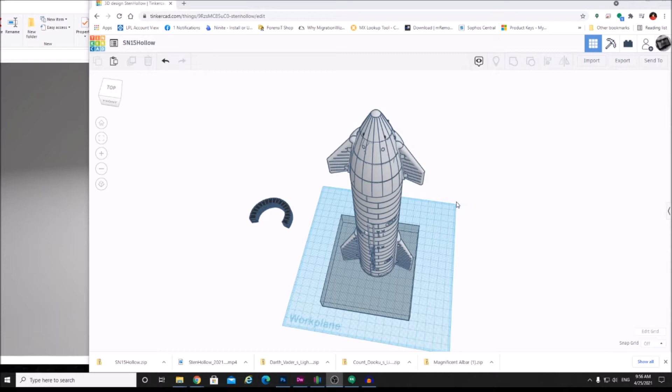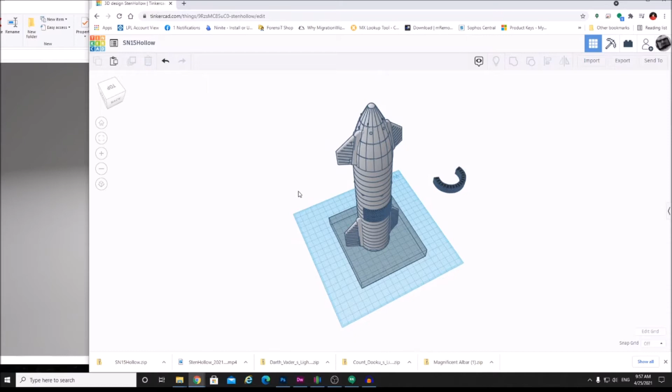You guessed it, it's a nerdy thing I'm doing right now. I'm working on a 3D model of a starship, which is nothing new, but usually that means a fictional starship. Well, times are changing, and this time I'm working on an actual starship, one called Starship by our very own SpaceX, which is making a completely reusable vehicle that will allow us to return to the moon in style, and Mars and beyond, thanks to in-orbit refueling and other nerd technobabble.

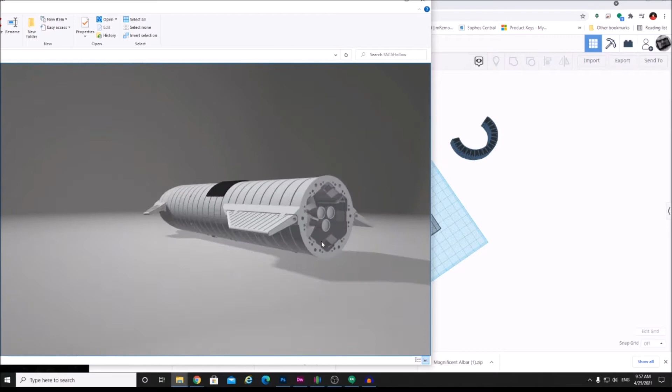So let me show you what I've been doing. First off, let me say I've been working on the shoulders of other giants who've been designing these 3D models. I'm taking mine a bit of a different way.

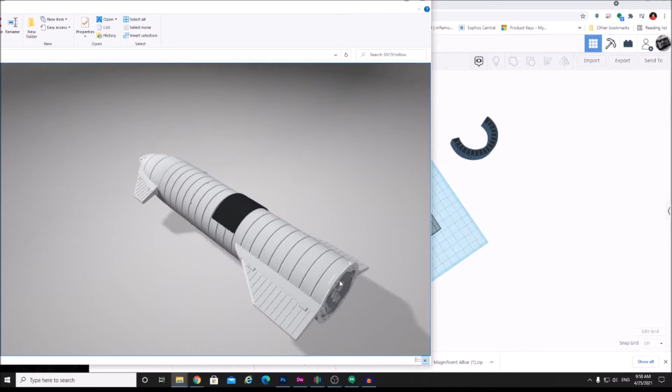I'm making SN15, which some of you may know is currently on the suborbital launch pad, getting ready to do its static fire tests and then eventually its launch. So I'm working on a prototype. This isn't the one that's actually going to go to space, but this is where we're at right now.

One thing I'm doing that might be different from some other people is designing one that can all be printed as one piece, at least the fuselage and the fins. I want the fins to be posable, like in the actual Starship, but I don't want them to have to be glued on. I'm just going to design it so I can print it all as one piece and the fins will be able to work.

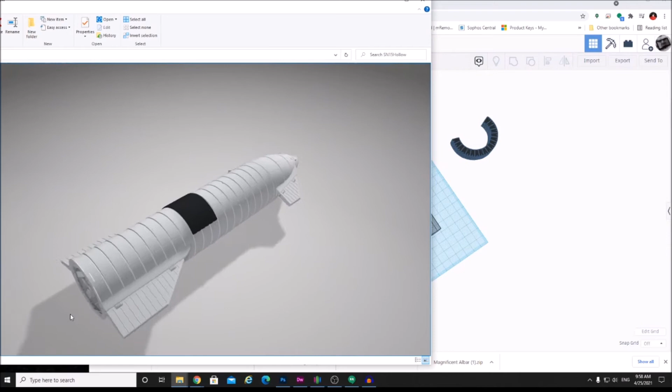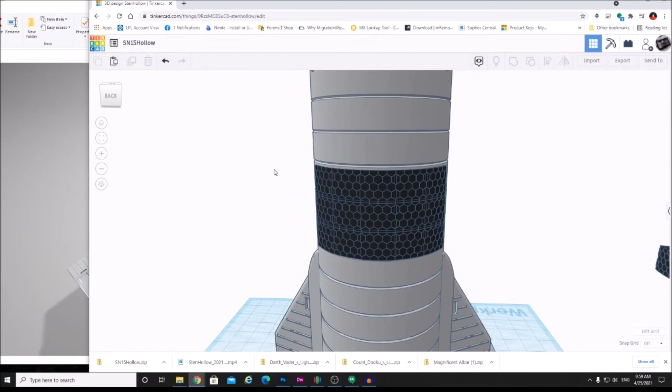Also, you may have noticed the hexagonal heat shield tiles arrayed here in their splendor. These are not, some of you might notice, completely accurate. Maybe they're slightly the wrong size, maybe you're counting the number of 304 stainless steel rings in the hull and saying that's not the right amount, or the grooves are too deep. In all of those instances, you'd be correct. This is not a hyper-accurate model by any stretch of the imagination.

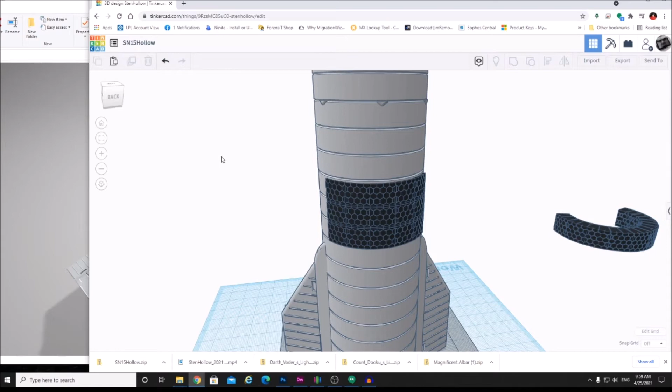What I want to do is make sure my details are a bit amplified so they'll show up after the model is 3D printed. If the details are too fine, you won't even see them because of the limitations of 3D printing. So what I'm showing you right now—oh, and I'm not resin printing, by the way, if you're wondering.

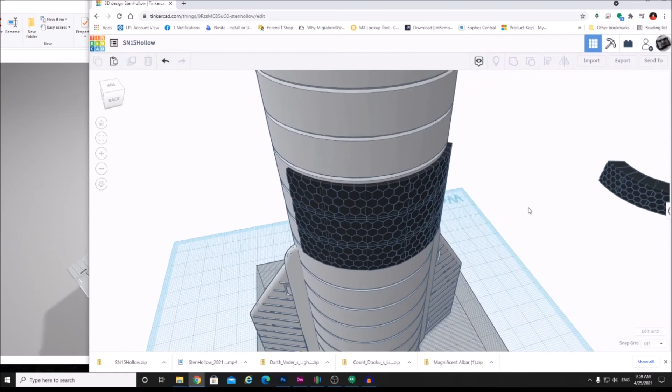So my master plan is to have these heat shield tiles, this sheet of heat shield tiles, be removable, so you could have them on or off, or get more of them and stick more on to cover the entire windward side or belly of Starship, so your model won't burn up on re-entry, because nobody wants that.

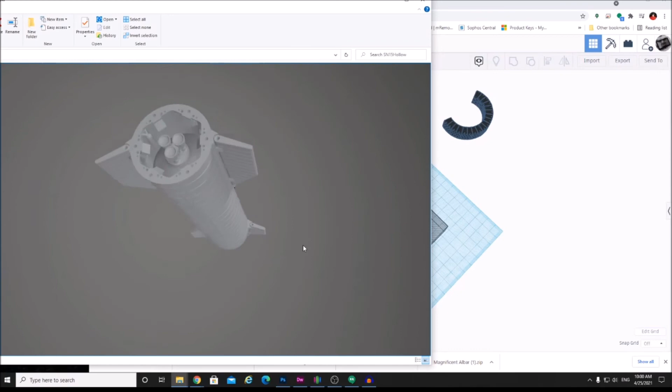The reason I'm planning to do it that way is, one, because I think it's kind of cool, and two, because later prototypes will have the entire windward side of Starship covered with these heat shield tiles, so you'll be able to take my SN15 and add more tiles to make it more like the 16 or 20, or whatever the plan is that they've got.

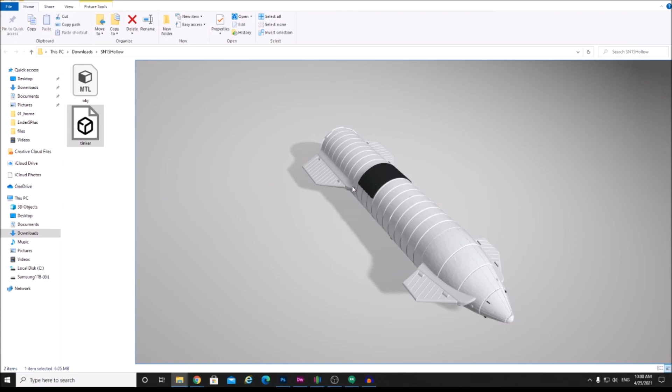Just basically fun nerd stuff. And it's always fun to take your 3D printed model and make the rocket sounds as you're watching a launch, having it whoosh back and forth across your face like a little kid, because there's no fun in growing up, right?